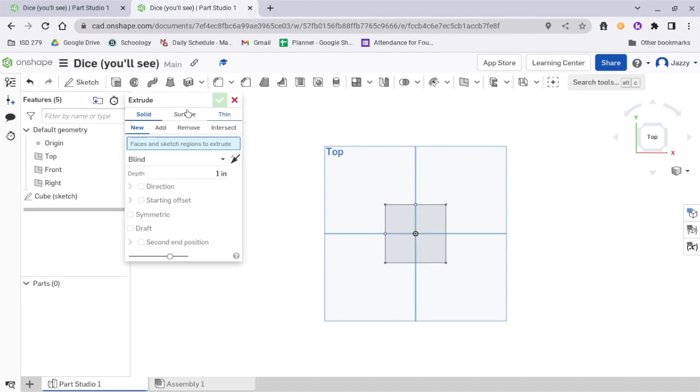First, let's extrude the cube. The extrude tool is right next to the sketch button. Instead of selecting a plane like for a sketch, select what will be extruded. We're just going to extrude the cube. Since the extrude is blind, we can just enter 2. So our die is a cube.

As for the other modes of end types you'll use in the future, they're pretty self-explanatory. The ones that say up to part mean you can select a separate part for the extrude. Once the extrude reaches the other object, it'll stop. Also, right now we're extruding a solid, but if you want to extrude, let's say a line, you would just pick surface. We don't really do that often, but sometimes you might.

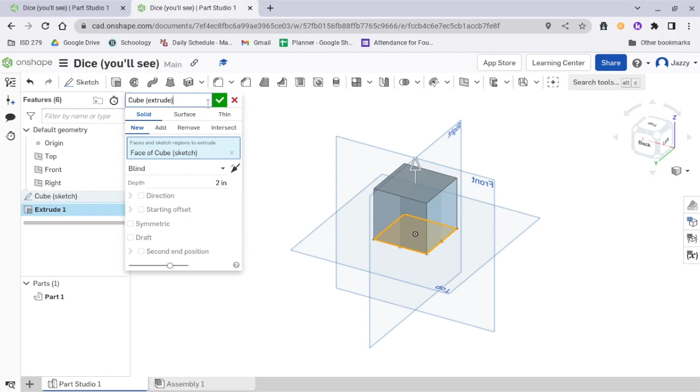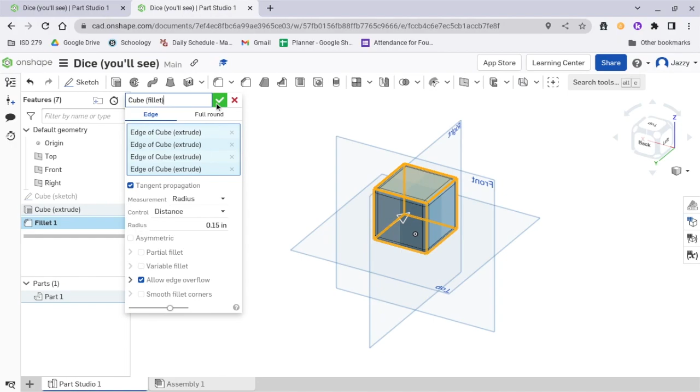Let's click that check mark to save the changes. We'll also fillet the edges to round them out. Just select the edge you want to fillet. You can select each individual edge, the faces, or just select the entire shape. If you want the edge to be more rounded out, increase the radius, and vice versa.

Now let's make a face. I'm going to start a new face at the bottom for the four side, and you'll get to learn some neat life hacks. First of all, I'm going to make a circle in one of the corners and add my measurements.

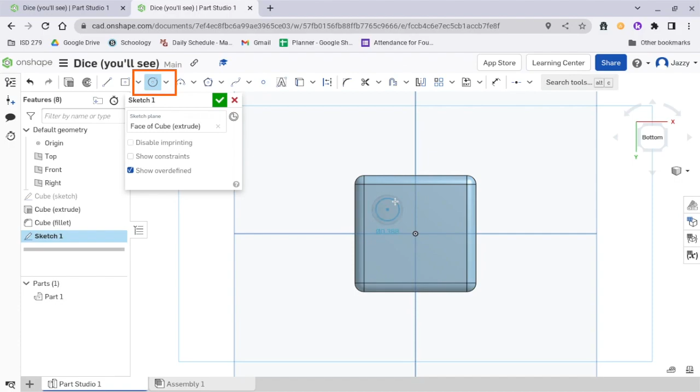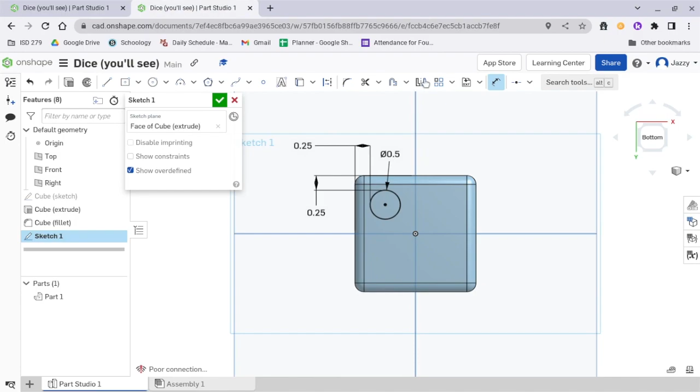Now, to make the 3 other dots, I have options. I could just make 3 more circles and do the measurements again. I can mirror all of the dots, or I could do a linear pattern, then mirror that. Let's do a pattern. Click on the linear pattern tool, which is the one with the 4 squares.

I want to pattern the circle, so I'm going to click on the circle. Right now, we're seeing what the pattern will look like. These circles won't be on the cube until we click to approve it. For now, enter what the center distance will be. Center distance is the distance between the 2 centers. I'm going to keep it as 1 inch, but I will change how many circles there will be.

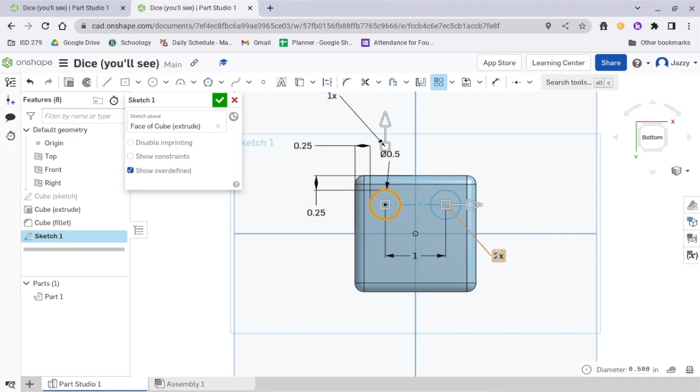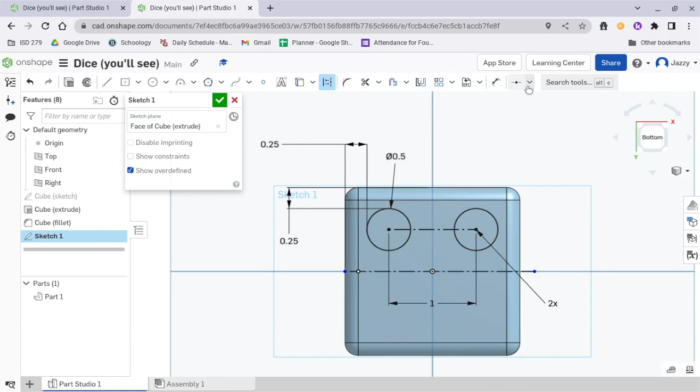I only want 2 circles, so in this 3 spot, I'm going to just replace that with a 2. Now we're going to mirror this, so it's on the other side. To mirror something, we need a construction line, which is like a normal line, but it won't show up when you extrude or anything like that with the sketch. Select the line tool, then select the construction tool. Make a line at the middle of the square touching the 2 sides. Not only lines can be in construction, other shapes can also be in construction.

Now we can pick the mirror tool, which is left of the linear pattern tool. Pick the line we just made and then the 2 circles. Mirror, ooh.

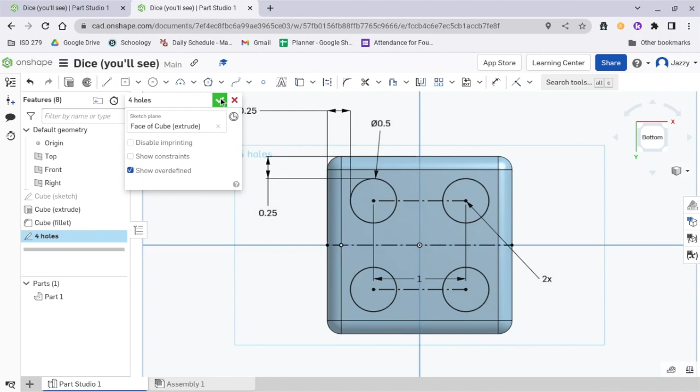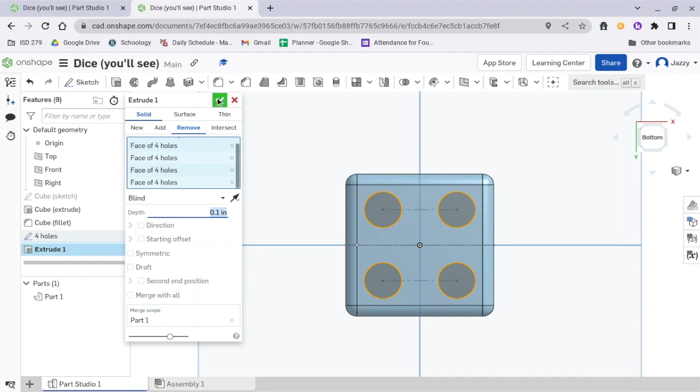Now I'm going to make another extrude for the holes, except this time I'm going to use remove, which guess what? Removes. You basically have all of the same options, it's just that instead of making something new, you're taking something away. I'm just going to do blind and enter in 0.1 inches for the depth. You can put in a decimal or fraction, by the way. And yes, you can fillet the holes, but I won't show that now since it's the same process and it's just repetitive.

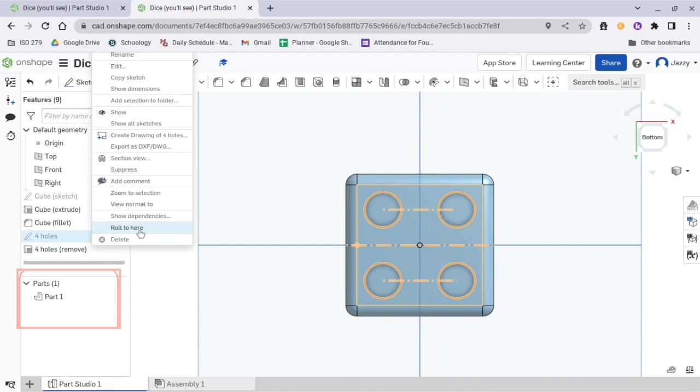Another mode apart from new and remove is add. This basically does the same thing as new by creating something, but in the navigation on the side, your addition will still be included in part 1 instead of becoming a new part 2. Like when we made our original cube, it made it into the new part 1. But if I were to add on to it, it would still be part 1.

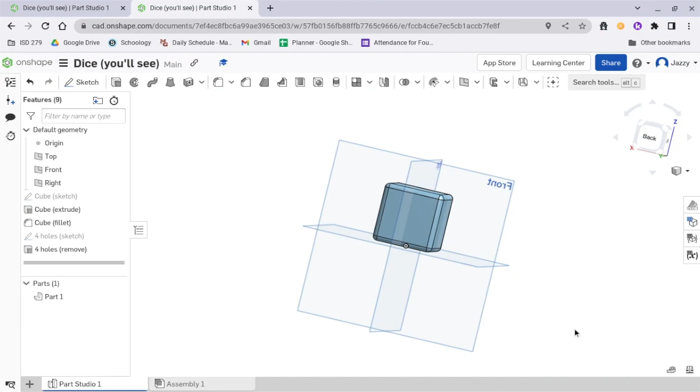For the rest of the sides, you can decide how you want to finish them. Also, even though they weren't used for the cube, here are things you should know. There's the offset, which sounds and looks exactly like what it sounds like. You'll make a shape, then you can offset it, so it's a little smaller or a little bigger. Then there's the suppress, which isn't a tool, but it's a way to take away a sketch or extrude without deleting it.